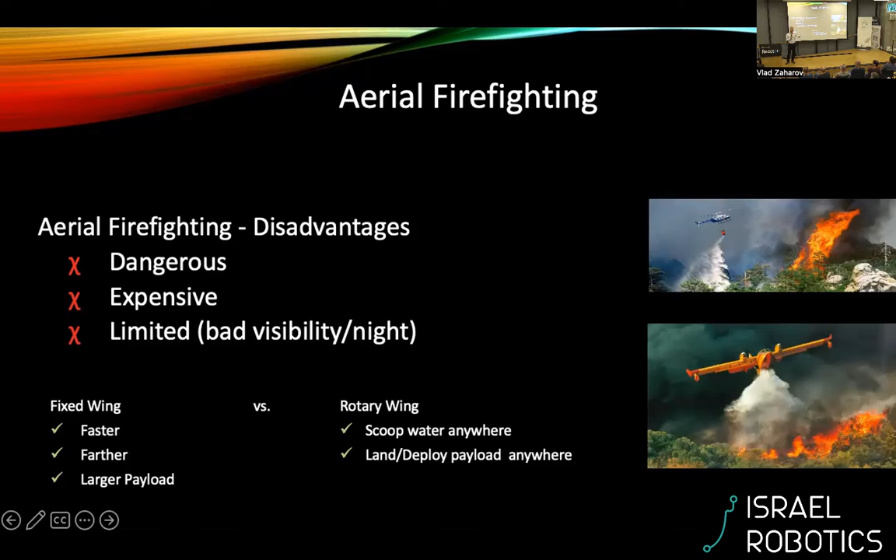The same goes for dropping. Airplanes cannot properly drop water on any terrain, whereas helicopters can. The team I was working with at the university works with multicopters, so it's a good match. What we want to do is enable a UAV to drop a relatively large amount of water or fire retardant precisely on a fire focus, and to drop it as close as possible.

Why do we want to drop it as close as possible? Let's imagine you want to drop water on a fire. You fly above it, drop the water, and that's it. But if you drop it from very high above, the water will either evaporate or disperse, or both. If you drop it too low, you're in danger of burning the aircraft - you're exposing it to very high temperatures and it will damage its structure unless you do it very, very quick.

Think about holding a candle and passing your finger through the flame. If you pass your finger quick enough, you will barely feel the heat, right?

So if we want to do this with a drone, we have a problem - it could be like a short blanket problem. A drone, in order to move forward, has to tilt its whole body. But to maintain flight, you need that at any given moment the vertical component of the thrust is equal or larger than the combined weight of the drone and the payload. So the problem is, if you want to drop the payload very low, that means you have to fly fast, but then you can only carry a small amount of water. On the other hand, if you want to carry a large amount of water, you have to fly very slow, so you have to drop it very high.

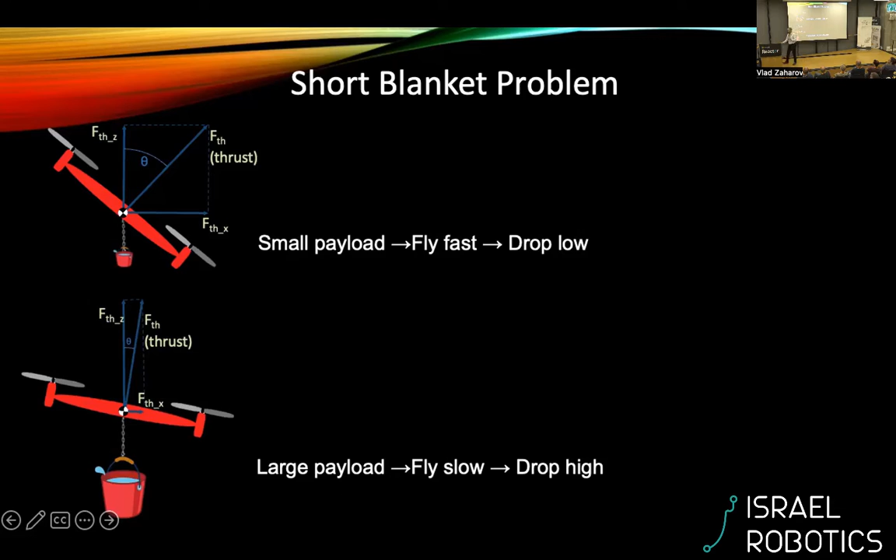Can we make some compromise? The idea is that, if we disregard the need of maintaining flight and imagine engaging in a very risky maneuver, you can tilt the drone even 90 degrees and exploit all the thrust to accelerate forward. The drone is falling.

It's totally falling, but it's also accelerating. At some point, you drop the water on the fire. You make sure that the moment you drop it, it will hit the fire. You have to drop it in the exact location, and then you're light, and you can recover.

When I started searching for literature to deal with mass variations, all the existing literature was about mitigating the effects of mass variation, considering mass as a disturbance. But what we do here is actually exploit the expected variation in mass to our advantage. We are able to recover because the drone is light later.

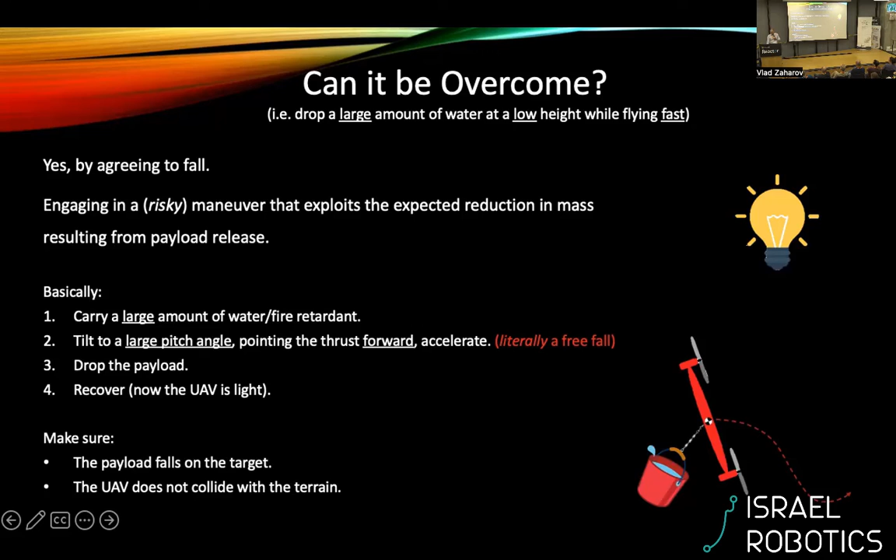So we approach the problem as an optimal control problem, in which we generate a time series of state vectors, including the position, velocity, and tilt angle of the drone at different time steps along the trajectory, the heading angle of the whole maneuver, and the releasing signal. What we want to minimize is the overall time of the trajectory. At the dropping point, we want to minimize the altitude and maximize the horizontal speed.

The constraints we have are, of course, that in order to go through this trajectory, we have to obey the dynamic model of the drone. We cannot do anything - it has to match the physics. We have to make sure that the payload, once released, follows a perfect ballistic trajectory and hits the target.

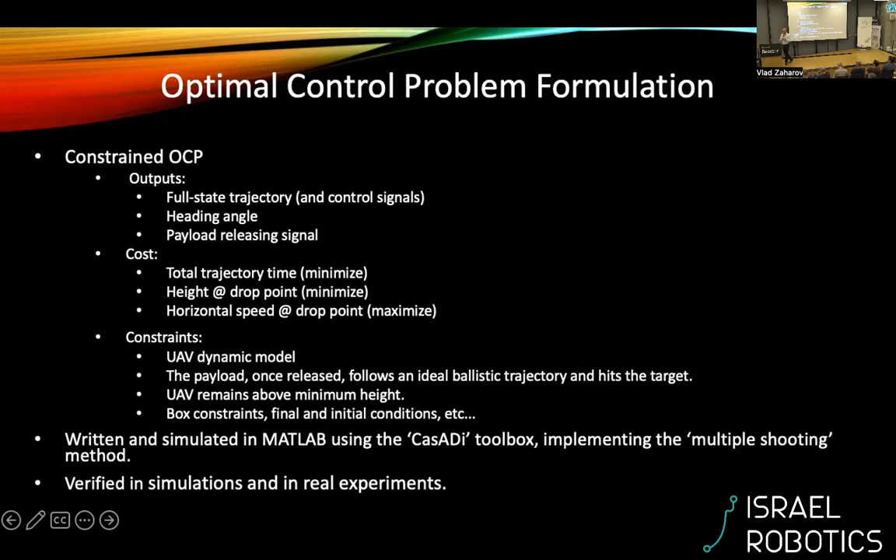We have all kinds of constraints - after finishing the trajectory, we have to avoid colliding with the terrain. That means we have to be at a higher altitude and rising. Throughout the whole trajectory, we want to maintain a minimum height above the ground to make sure we're not colliding, as a safety measure.

So this is the result of the optimization. This is the shape of the path. It's actually not something I designed - it's the outcome of the optimizer. What I told you before about tilting the drone was my imagination, but after describing the problem to the optimizer, this really was the outcome, not surprisingly.

We divide the trajectory into three phases. The first phase, the red one, is the approach phase, in which we are accelerating and falling. The green phase is where we are releasing the payload, and the black phase is the recovery.

The solution for this - I described the whole problem in 2D on a plane, and the reason is because of this dimensionality, the problem becomes much smaller and much more manageable. So the optimizer is able to output a solution much quicker, and it allows future implementation into a model predictive control. For those who don't know, model predictive control consists mostly of recalculating a trajectory and executing one or a few steps, then recalculating and updating the trajectory over time.

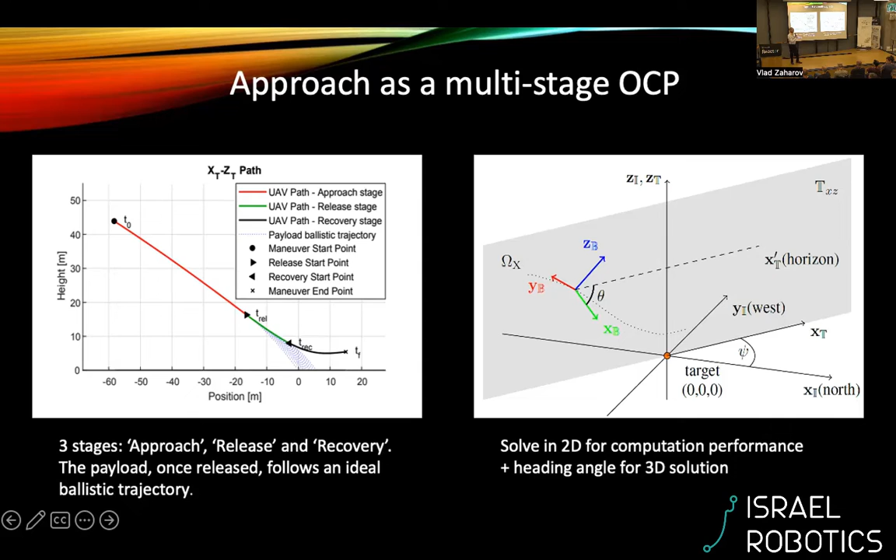So in order to still provide a 3D solution, what we do is rotate this whole plane. We take into consideration environmental parameters.

This is not done in... the joke about the spheric horse. This is not done in... yeah, exactly, in vacuum. This is not done in vacuum.

We take into account aerodynamic drag and terrain gradient. Of course, it's not like a real terrain gradient, but it has to be like a smooth surface - but it can have any orientation, any tilt.

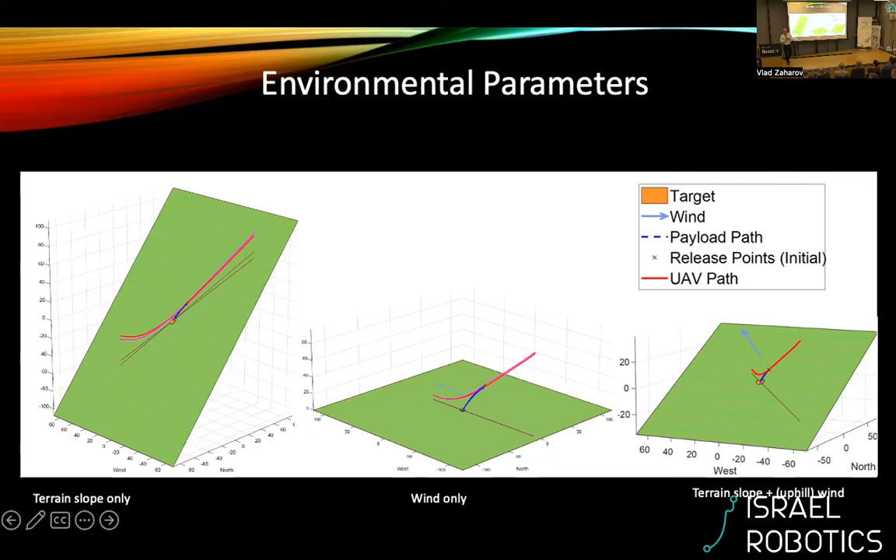We also consider different releasing mechanisms. The first would be like dropping a balloon or a container with water. The second would be a constant flux pump. The third would be like having some kind of container with a hole on the bottom.

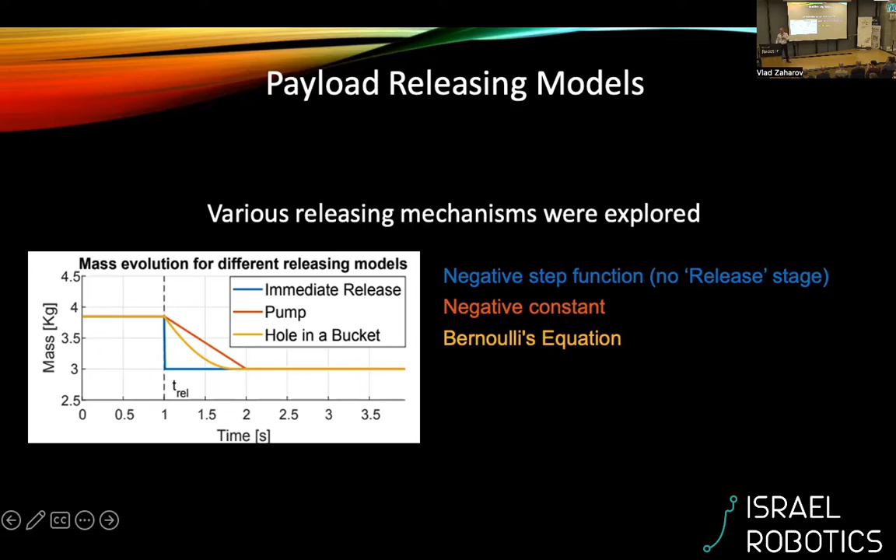Then we proceeded to Gazebo. And at last we did two test campaigns in a test range in the outskirts of Prague.

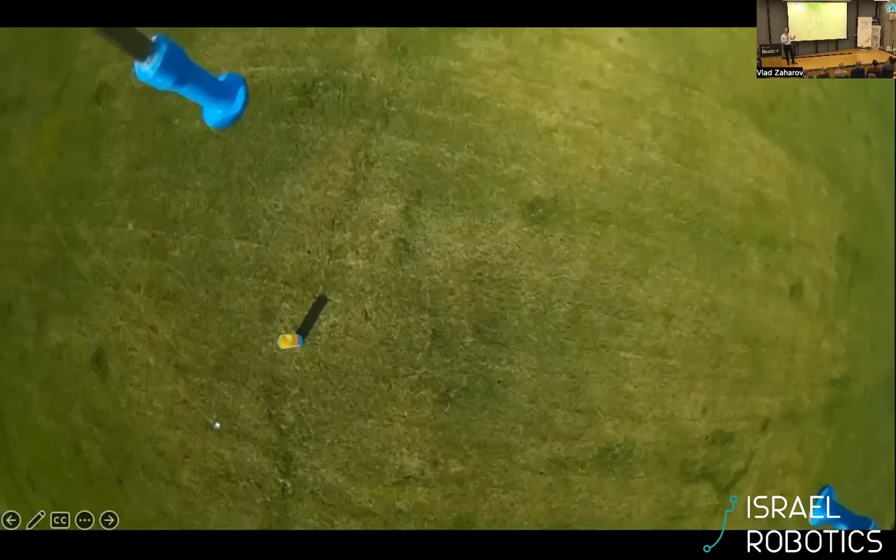The first one was more mild, with higher safety measures. We actually dropped from a higher distance at lower speeds. We incrementally raised the weight. It was mostly to make sure that we were not going to crash, and to identify sources of error. For example, these disks we were using sometimes glided, or because of the high rotational speed, sometimes they threw the disks away. But after we identified all the sources, we turned all these switches off.

The guys at the university were like, are you sure you're doing this? Yeah. So we allowed the drone to tilt actually 90 degrees and fly extremely fast, dropping the weight.

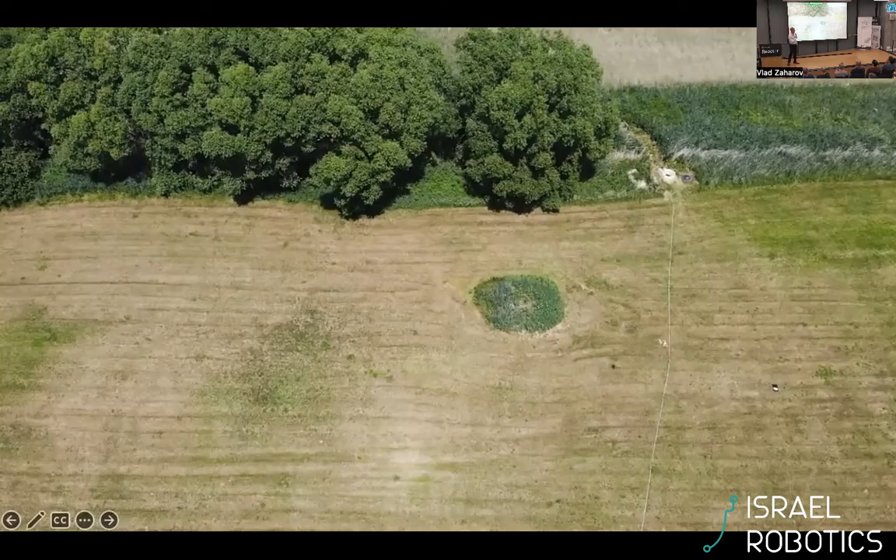In order to prove that we actually had the most extreme maneuvers we could possibly have, the last test simulated a malfunction in the releasing mechanism, to prove that it is so extreme that if we cannot release the payload, we actually cannot recover.

Did we crash a drone on purpose on the last test?

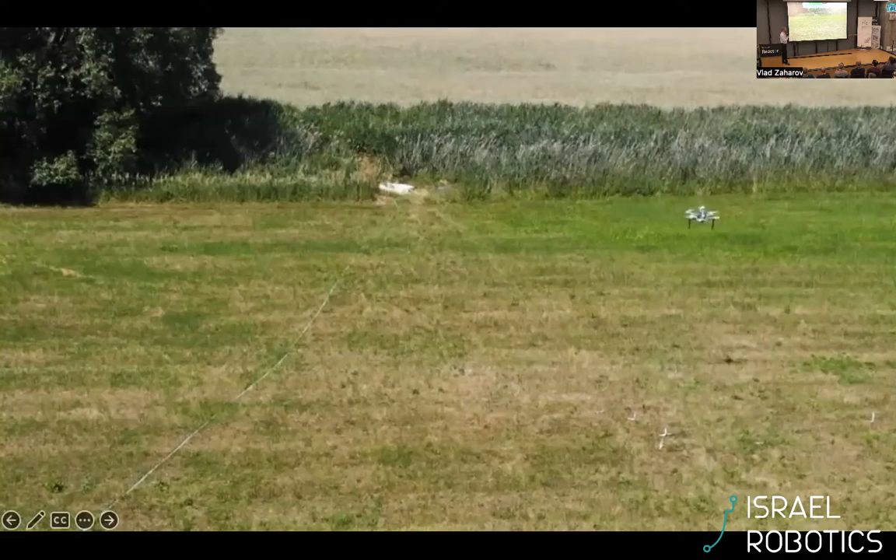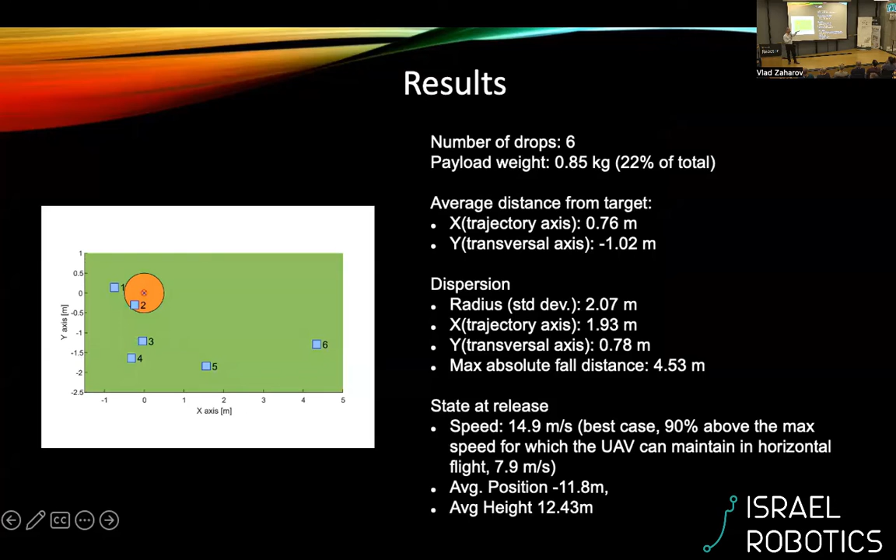These results, after we published them, got us into the Robotics and Automation Letters for 2020, and also the International Conference on Robotics and Automation. The payload was very large, about a quarter of the overall weight. With that, we managed to achieve velocities 90% higher, almost twice the nominal speed of the drone. We dropped at 12 meters, and even then got an average standard deviation of droppings of less than about 2 meters.

That brings me to my second project. After coming back from the publication, I was approached by an acquaintance who works in a drone delivery company - I'm not going to say which one. They said they have this problem: if you have, like Zipline, a fixed wing aircraft dropping, it cannot drop very accurately. So most drone deliveries that need to deploy payloads very accurately do it with multicopters, or hybrid designs.

The problem they have is that the whole drone has to be designed for the peak power consumption, right? And all the minutes they either hover or land, they consume a lot of power, and their active radius gets reduced - very limited. So what they asked me is if I could come up with an idea for laying the payload very smoothly and very quickly without needing to hover above.

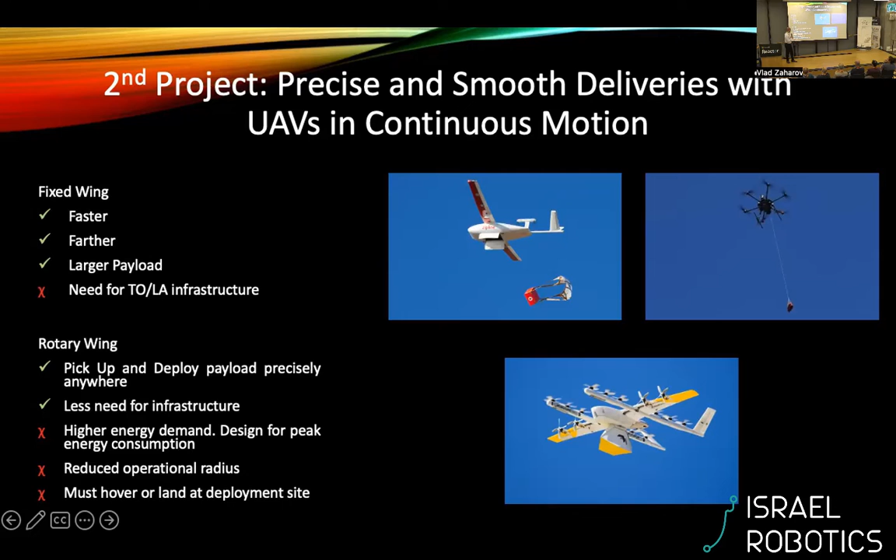The idea I came up with is an evolution of the algorithm I just presented. Imagine you're flying and approaching the dropping location. A few tens of meters before, you extend the payload with a tether, like a wire, flying with the thing hanging. You start inducing oscillations on it by accelerating and decelerating. You can coordinate the movement of the drone such that at the moment the payload touches the dropping point, it will hit the ground at zero speed - zero vertical, zero horizontal. Then you cut the tether or release it and keep flying. So yeah, I did all the modeling.

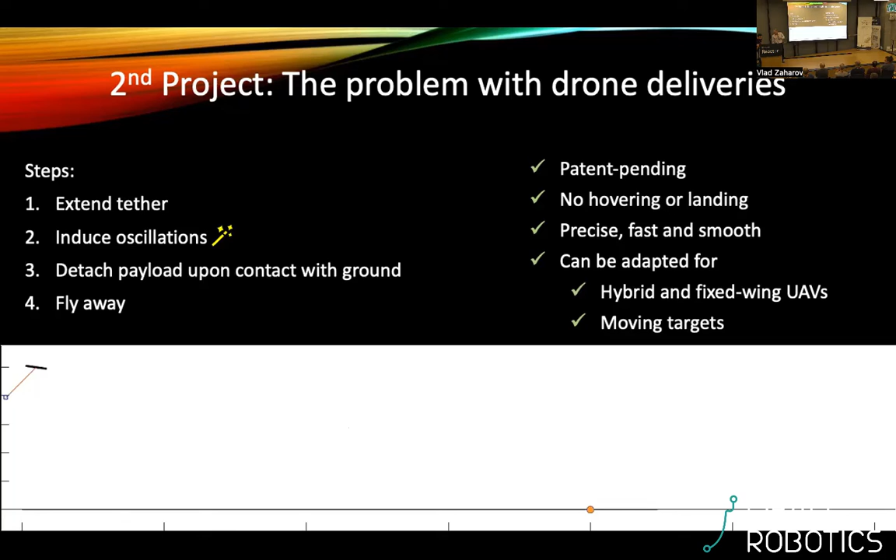Cannot play media. Try to play it like this. Mac.

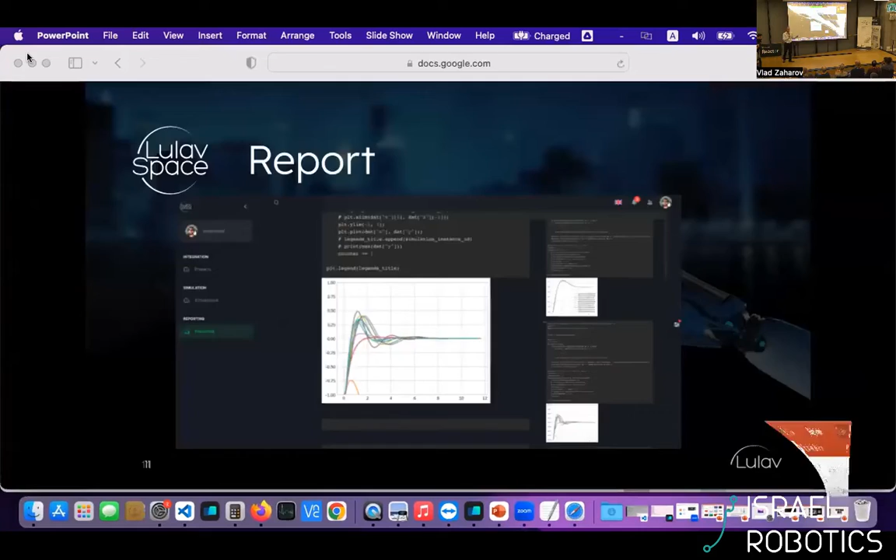I assure you this works. I didn't try it on a physical platform, but in simulations - what I'm showing is not an animation, it's a real simulation taking into account aerodynamic drag. The dynamic model can also be adapted for fixed wing aircraft, not only rotary wing. It can also be adapted not just for a fixed point, but for a moving platform, like a ship, a vessel, or a car. And it's patent pending.

You will have to believe me.

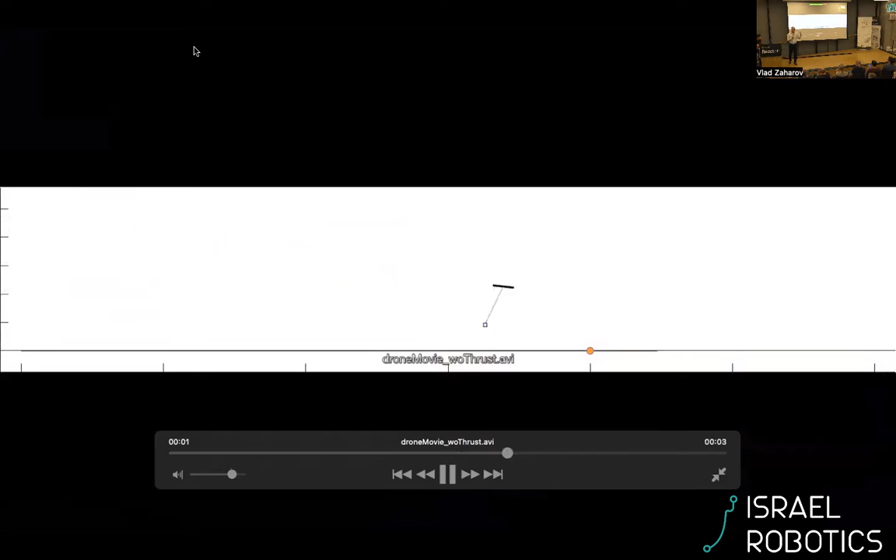The reason you saw the blue box, the payload, being dragged backwards is because of aerodynamic drag. If you change different parameters, you may in fact induce real oscillations. It really depends on the ballistic coefficient of the payload and atmospheric pressure, et cetera. Of course, you have to provide a feasible set of parameters. If we imagine this being a jumbo jet trying with a 30 centimeter wire to land between the buildings of Manhattan, it will not work. But there's a certain set of parameters where it actually works pretty fine.

Yeah, it's probably giving maximum thrust. One of the constraints I can limit is the maximum thrust. Of course, I want to leave some margin to allow it to maneuver. But it depends on the weight you put on the drone and the thrust to weight ratio.

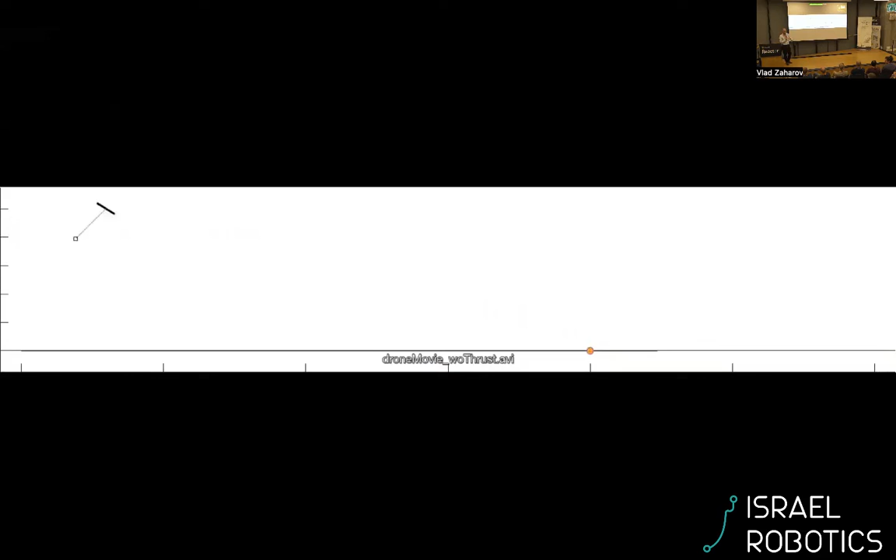So yeah, it was too good, so I patented it.

So back to the presentation. Yeah, that one. Yeah, thank you, that's it.